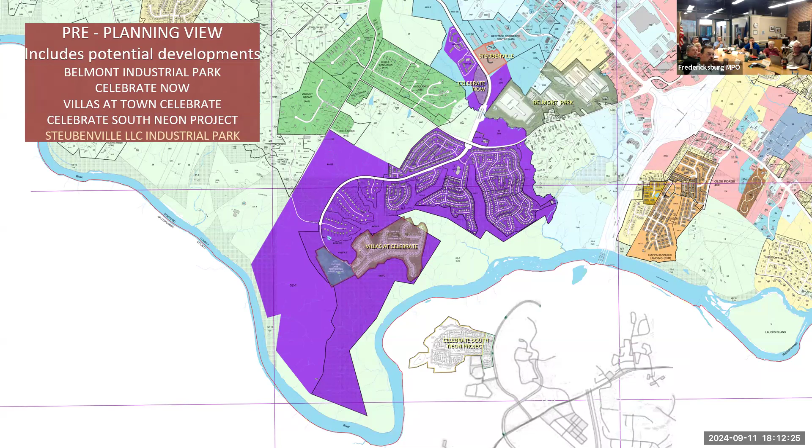But the reason that this is pretty important is, and we'll get into this in some of the other slides further on, when we start to add the roadway pathways that have been presented so far, you'll see what the problem winds up being. Okay, we'll go on to the next.

All right, these were the original plans that FAMPO had created before the consultant was involved. So we had option A over there in the red, which obviously would be impactful on Belmont Park, should that happen. Goes down south, crosses the bridge, crosses the river, pretty close to where I-95 is, and of course where the Quarry Lake is, and where the England Run stream is, right there.

Either going down Celebrate Virginia or actually going down Greenbank Road, you would then be able to do option B, which is this kind of yellowish color, which of course you can see conflicts with potential approved property for the Villas at Celebrate, and then crosses the river and connects to Gordon Shelton Boulevard. C is the blue one, which again could be arrived at by various different ways. And it's basically the most direct route, crosses over, but of course, the Silver Companies Celebrate South Neon project wound up being directly in that path. So that had to be modified.

And of course, in green, with the Greenbank Road, it was going to be an extension at the very top where the Commerce Parkway was going to be extended. It was going to cross over, pass through an existing apartment complex that's owned by Celebrate Virginia. Then ultimately connect to Greenbank Road, go down all the way, and then, of course, you'd be able to use any of these different options. Option D being the furthest down into your Cannon Ridge and then across. Now, this winds up not connecting to Gordon Shelton Boulevard, but it was going to connect actually to the Carl D. Silver Parkway right at that point. So those were the original ones.

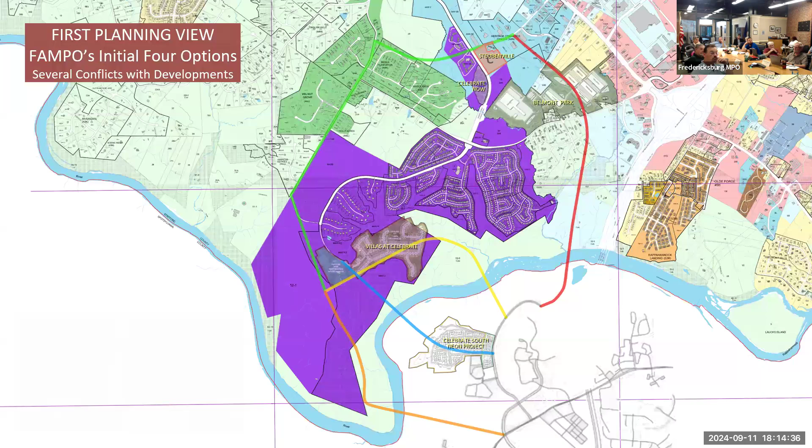Then, of course, the consultant has been making some modifications. And if we can go to the next slide, we'll see those. Okay. The method of getting to purple, option A, still uses Commerce Parkway, but it doesn't access it in the way it did before. Still goes through Belmont Park, goes a little bit further east. It is very close right here to a stream, which is called the Laurel Branch. It goes up there, and there's an RPA in that position, so it's close to that. It crosses within 100 feet of a home on Sanford Drive, and then was going to cross over another home off of a side street from England Run Lane. And then come pretty close, a little bit further away than the original FAMPO model, but still cross and connect to Gordon Shelton Boulevard.

B and C make use of Celebrate Virginia Parkway. B would still kind of interfere with the Villas at Celebrate if that was to happen. And then C would go down further into Cannon Ridge, and so forth. The difficulty with this particular C is the elevations are very varied here because there's several different streams that come in there. So this would involve a lot of changes to the topography to accommodate that. And there also are bluffs here on the eastern side of the river that would be definitely difficult to modify too. The other thing with C is where it connects to Gordon Shelton Boulevard, it actually passes through two housing developments. There's an access road to get to the different housing developments, but it was going to pass right through there.

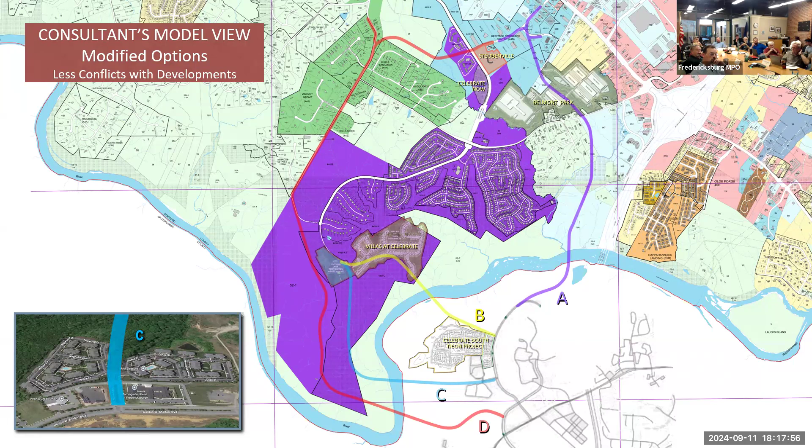Go on to the next one.

Okay. B2 is a new option that they have recently added. The reason that B2 was added is because you can see that B1 originally was potentially going to go through this particular Villas at Celebrate project, but now, of course, at the very end of the extended Celebrate Virginia Parkway, that winds up avoiding it. You can see both B1 and B2 do not interfere with the Neon project anymore, that it goes north of that before it connects to the Gordon Shelton Boulevard.

Okay, all right. Can I add something? Absolutely. Okay, I just want to point out that there's supposed to be over 40,000 trips a day by 2050. And if you have a segment that's shorter like this versus B1, let's say B1 is a quarter mile longer. So if you have 40,000 trips a day that have to drive a quarter mile longer, multiply 40,000 times a quarter mile, and you come up with 10,000 more miles per day of driving. So that's 10,000 more miles of air pollution and fuel usage.

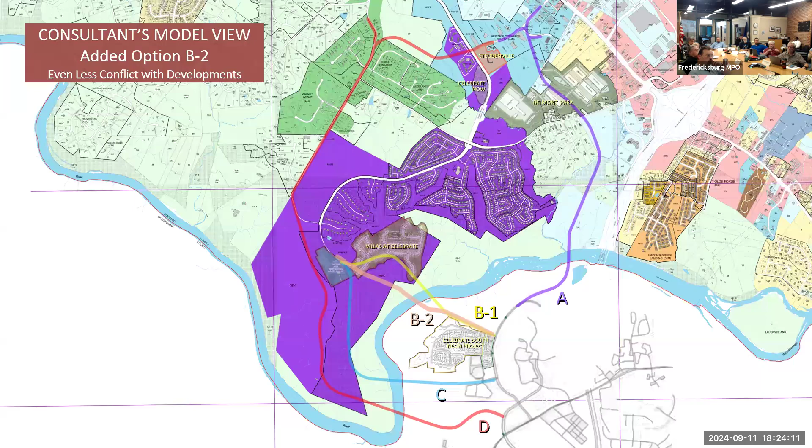I can talk about the Celebrate Virginia Parkway a little bit later on, but there's some information I want to discuss about that. Okay, next slide, please. Okay, now some citizen modeled a different view, and of course that was me. So these are just observations from analysis that I made, and I decided that we might use a few other things.

The original consultant's view for option A there, I moved where it winds up connecting to Commerce Parkway from where they had it before, where their paths were. And again, keep in mind, any lines that are drawn are simply lines on a map that will ultimately be modified one way or the other. That's obviously happened many times already. But the lines that the consultant had created, which was on the purple map in the previous slide, actually had paths that were going over existing buildings on Commerce Parkway and so forth.

The other thing that I wound up doing, as you can see, now it avoids any of those existing buildings, so it's not interfering with them. At Commerce Parkway, the path came through here before, and if you recall, I said it was about 100 feet away from a home. And it was very close to the RPA, that's for the stream that goes through there. Well, I've moved it further east away from that so that it was not going to be interfering with the home, and it wasn't going to interfere with the RPA nearly as much.

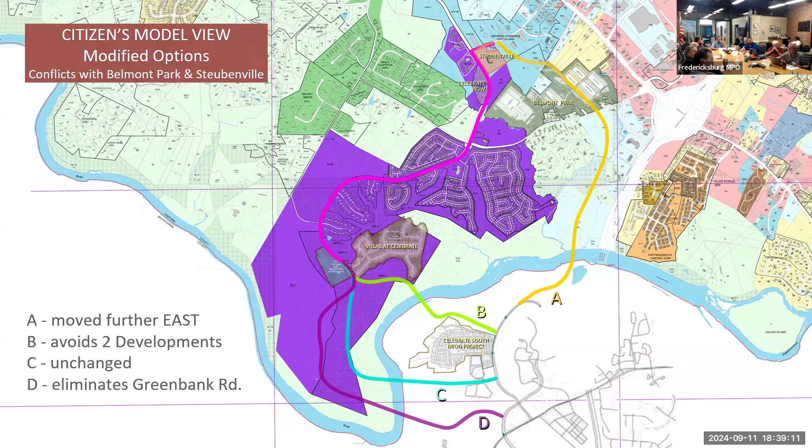Yeah. Okay. If I were this Commonwealth Transportation Board guy, I'd say D is your option. Let's roll with it. I'll give you the money for the bridge and the developer can build a road to it. Right? Yep. Joe, is that still in the SSD, the Special Service District? Wasn't Celebrate in a Special Service District before? Yeah, they're in a CDA, Community Development. But that area also has an agreement with the Department of Historic Resources that needs to be renewed.

But what I wanted to say is, if we really want to maximize the use of existing infrastructure, Celebrate Virginia Parkway is it. The other map showed it better, but if you look at the aerial view, it's 6 lanes on half of it. And the intersection splits up at Banks Ford, so that diffuses the traffic in different directions to make traffic flow better. Then you also have the underpass on Route 17, so you don't have to make a left turn, just take the loop. That's right.

And so that infrastructure also has a sidewalk that goes under 17. So if you combine the trail system with that sidewalk, you can cross Route 17 without pedestrians and traffic touching. So there's so many different benefits to it.

And I presented these benefits in a presentation to this committee about 2 years ago. So what I'd like to do at the next meeting is have a presentation, and I'll revise it some, put it back, kind of like Alan's presentation here. All right.

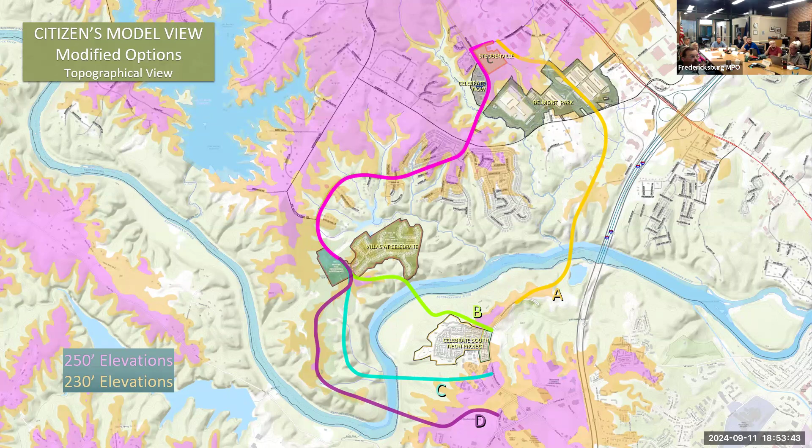So again, this is in the slideshow that's presented for you. You can look at it in much greater detail if you zoom in really closely. And like Mr. Hollis said as well, regarding where A connects into Commerce, we can look at that in the next slideshow really quickly, and I'll try to breeze right through that as much as possible.

Okay. So, I wanted to show you the side-by-side comparison of the two, so you can see the consultant's option versus the citizens' options. And this is south of the river and so forth. So, again, you can look at them and see what the difference is. D is essentially the same. C is too, other than the fact that it connects to Celebrate Virginia Parkway in the citizens one.

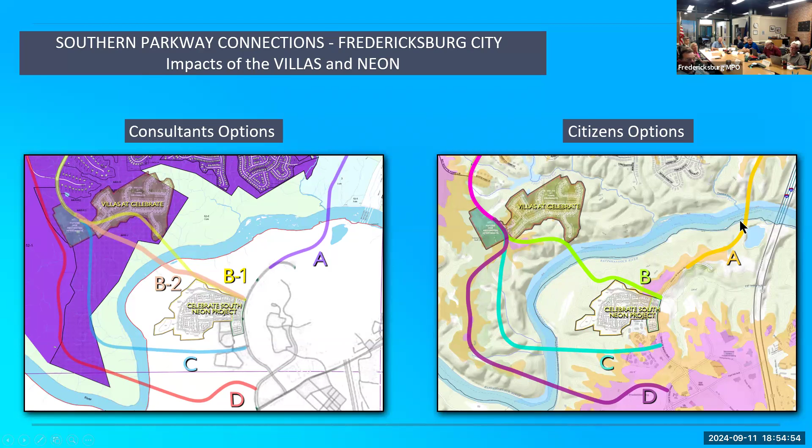B1 and B2 are slightly different, but also avoiding the neon project and avoiding these particular potential developments, as opposed to B1 possibly interfering and B2 doing a pretty good job at avoiding it. And again, a little bit further away from where the stream empties into the Rappahannock. Okay, so that's that. We can move on.

All right, now north of the river. What Mr. Hollis was talking about is these curves that we have here, if you were going to use option A. And again, that could be done, but I suppose if you really wanted to, where this citizens option connects to Commerce, that could be modified obviously up there too. But as it is right now, there are businesses there that are impacted somewhat.

This homeowner that I talked about, that's right there, that's 100 feet away from their home. This one is actually going over this home here, once we get to the point that I was looking at moving it further away so it doesn't interfere with where the homes are and so forth. Okay.

I'm sorry, go back one more. I just wanted to. Yeah. Yep, that's the one. Okay.

All right, I wanted you to know that this A and this A are in exactly the same positions on the map. So this is one way to tell that it's further east. Okay, that's all.

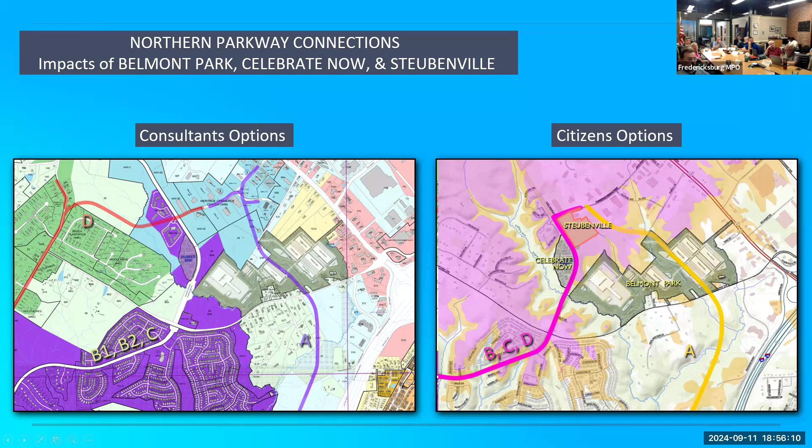Okay. Commerce Parkway is like the key for almost everything because of the fact that all the different options wind up connecting some way. All right. Here's where it ends right now.

This is a wrestling center right now. There's the Steubenville LLC property that you can see right there. So right now it's in that position, and Belmont Park is outlined by the red over there. So Steubenville again has begun to be cleared, and access at the end of Commerce Parkway through this, you kind of can't really see it on here.

This isn't 4K, is it? But the construction is going on, and this from Celebrate Virginia Parkway, you can kind of see how the clearings are going on. I inquired why there were no permits that were displayed anywhere, and a week later they were there.

So like I said, it was at a policy committee actually that some of the residents of the Del Webb community asked the policy committee, what's going on south of where the FBI building is. And the FBI building is right there. So that's essentially what prompted me to investigate a little bit more.

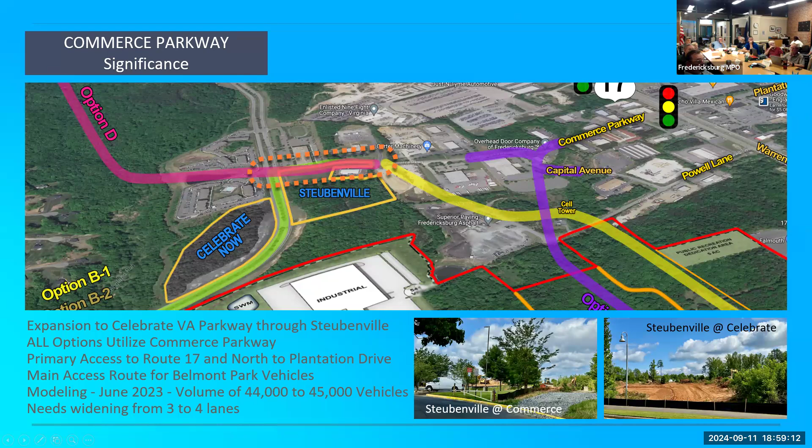So the question is, if you're going to try to get bicyclists and joggers and walkers to use that, I can imagine that if I was north of the river, in order to get down to Celebrate Virginia South and Central Park, et cetera, I have a definitive goal, a reason for going south along the bridge to get to those spots, even if I'm just jogging.

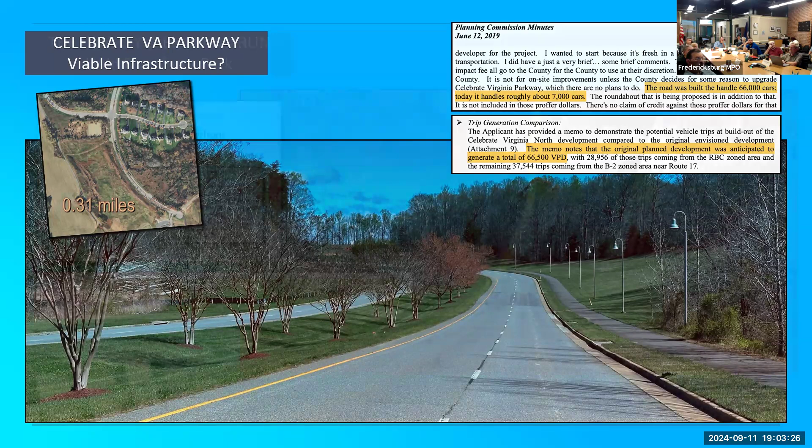There is the Wild Riverfront Park development, which essentially takes the quarry and provides access along the quarry. So if there was going to be a roadway right in that particular area, I think that would probably interfere with that whole concept. So I just wanted to point that out as well. And there's the written description of Wild Riverfront Park. I think it's on page 19 in the comprehensive plan for the city of Fredericksburg.

All four options will go through the Wild Riverfront Park. Excuse me? All four options, or 5 options, will all go through that Riverfront Park. Well, that's supposedly where they have it located in this area. John will show you a map of the whole environmental plan for that whole riverbank and all four of them. Well, I'm not saying that it wouldn't interfere with any of the other plans. I'm just saying that what they intend to do here, as far as the activities, really wouldn't be viable if the roadway was there.

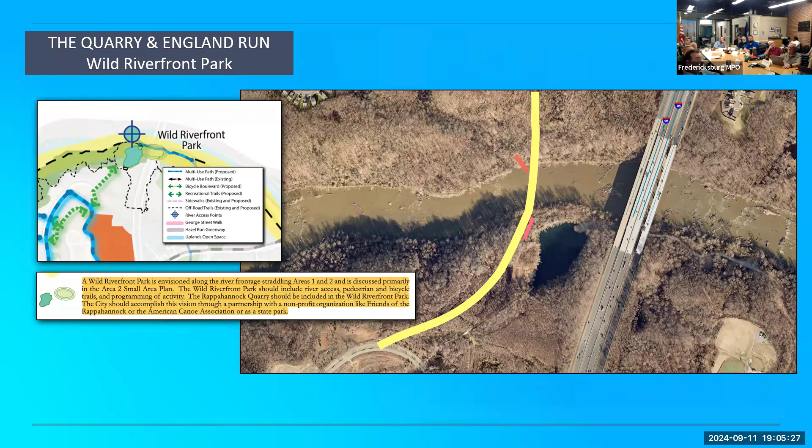Okay. You're gonna be talking about all this. I got the updated one, yep. Because one of the most important things that we haven't even discussed yet are the easements. And the easements basically push everything towards using natural land.

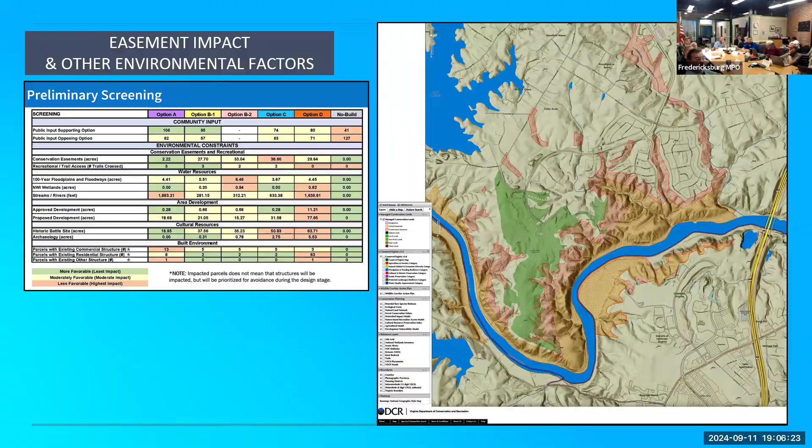I don't know what the priority is or how easements could potentially be involved or how to get around them. But you can see in the map that there are no easements, whether they're co-held or whatever, east of the England Run stream and right up to the quarry too. But once you get into any of the other areas, there are easements in place. And we know that Friends of the Rappahannock, et cetera, are very concerned about losing the easements that they currently have. Okay, thanks.

One more quick. Belmont Park winds up being involved with all this because of its location, the fact that option A goes through. All right, Google 3D map. Basically, we have Celebrate Virginia Parkway right here. You can go to the next slide, actually. All the different traffic lights along Route 17. Commerce Parkway right here, Powell Lane right here, and Plantation Drive right there. There are a lot of traffic lights along there.

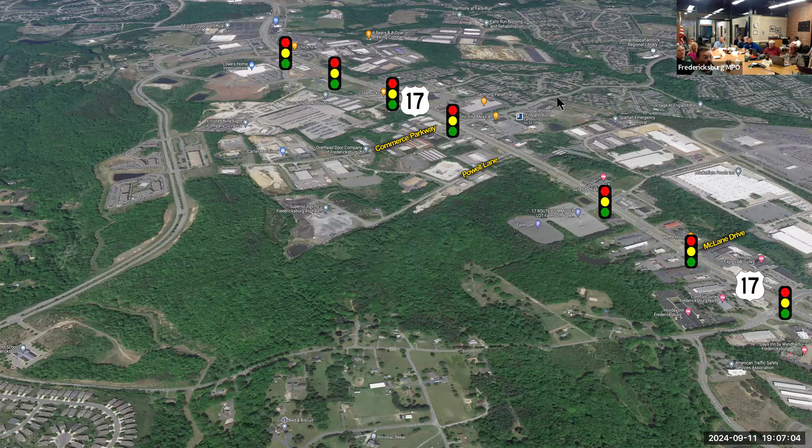Where Belmont Park is, and we can go to the next slide. Belmont Park, the way it was drawn up and recommended to the Planning Commission and to the Board of Supervisors, is that the main egress to Belmont Park is along Powell Lane.

We're talking about 450 tractor trailers a day anticipated and stuff like that. They will only have right out or right in, which means that none of the vehicles that would be traveling along Route 17 in a northwesterly direction would be able to use Powell Lane whatsoever.

So that is why there's a proffer that Belmont Park offered for retiming and redevelopment of the Commerce Parkway intersection. Because so many of the vehicles are going to have to ultimately get to Belmont Park by using Commerce Parkway and the traffic intersection that it has, and then go down what is known as Capital Avenue to get to Powell Lane to ultimately get into Belmont Park. So I just wanted to point all that out.

Right in, right out, Powell Lane, left in, left out, Commerce Parkway. But because it has the traffic light, you're gonna be able to go in and out using that intersection. But again, Commerce Parkway right now is just, it's not even 4 lanes here. And of course, this is the extension that we were hoping for. Okay, next.

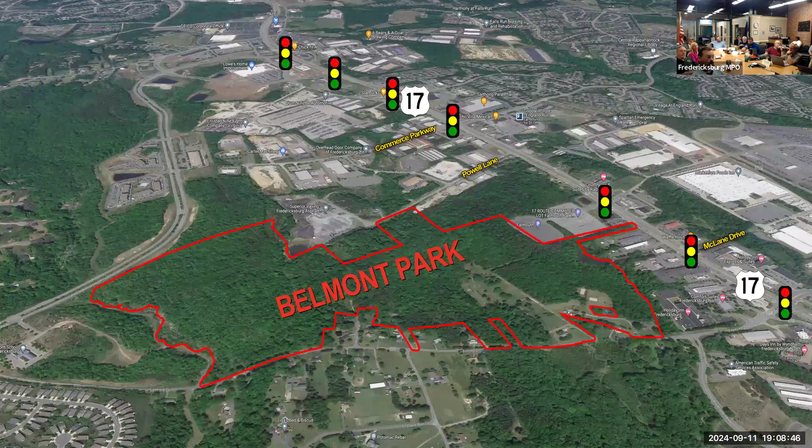Okay, the way it was developed. Heavy industrial for M2, M1 over here in this area. Okay, this is Sanford Drive, by the way. Riverside Parkway down here. Okay. And next. Okay, the original concept plan.

This building is the only building that they have a user to occupy. None of the other spaces have potential users. The A. Duie Pyle trucking firm wants to use this particular part of the property. All right, they have nothing else for the other areas.

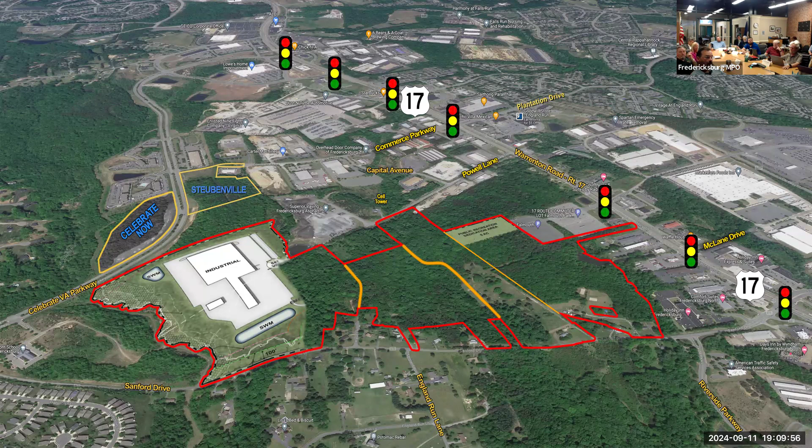Okay. The proffer of 5 acres to be used for recreational purposes was proffered by Belmont Park to the county. So there's 5 acres that are in that particular area. But again, this is the only area that's currently intended to be used. We see the Steubenville property, we see Celebrate now, so you can kind of see what was all going on there. Okay, next slide.

Okay, the consultant's options. Again, going over some of the buildings, that's why it's circled right there. My question here is, as it was going to cross over Powell Lane, what kind of intersection would that be if there are tractor trailers that are potentially crossing here? Because if there are 44,000 vehicles potentially using this a day, that is going to be a point of contention where you would have vehicles trying to leave the area here or the other developments that happen here, as opposed to, are we going to need another overpass there besides the overpass that would be necessary over Sanford Drive as well? I don't know.

Consultant again, right here, they're right in the stream RPA area. So that was that. And they also actually were going over the top of a home that was in that area. Okay, no problem. Can I add one thing? Sure. The Belmont Park proffer a connection road between the east side and the west side going across option 1, so there'll be another intersection there too. Proffers are county law, so.

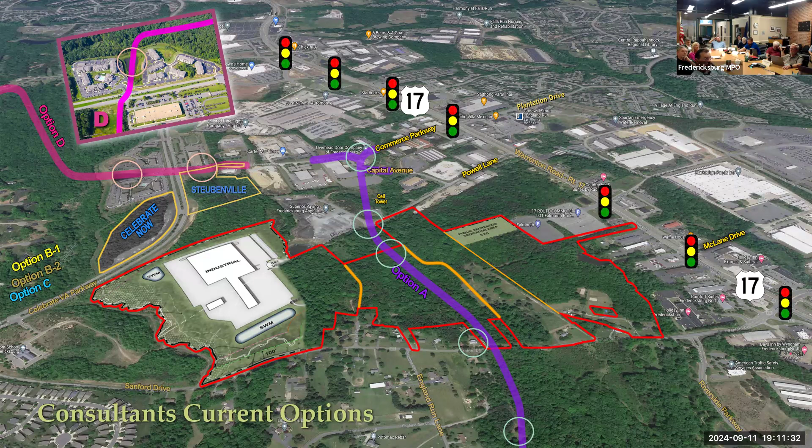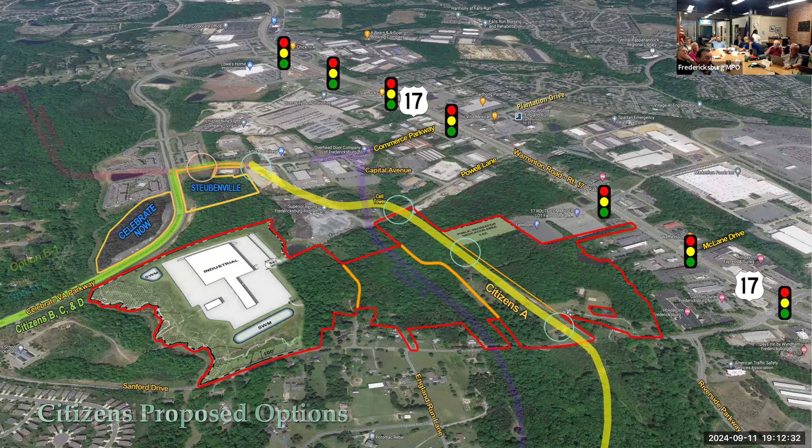And again, going further away from where the homeowner is tucked away in that area right there. Okay, and B, C, and D in the citizens plan will make use of Celebrate Virginia Parkway. Okay. And then if you were to compare the option locations, you can see consultants options, the citizens options. Option D in the consultants, B1, B2, and C along Celebrate. And if you were using the citizens, it would be B, C, and D using Celebrate Virginia Parkway.

Now, remember I said as far as the bikes and pedestrians, there is effort still to try to develop this land similar to how the consultant originally wanted to do it back in 2021. This entire 132 acres was supposed to be for sports tourism. There were gonna be baseball fields, little league fields, soccer fields, 2 indoor athletic facilities.

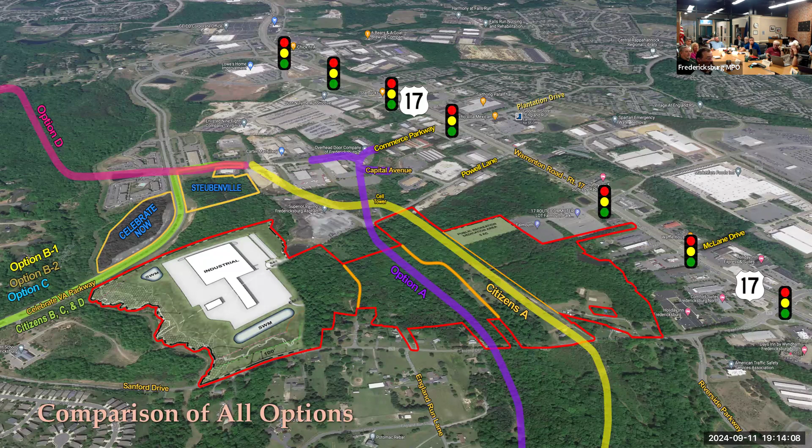If you were a bicyclist and pedestrian walking or jogging, and you were going along there, would that be a better reason for using it, that kind of recreational use, as opposed to all the other options that currently exist for the industrial uses? So Mr. Breeder and myself and several other people are continuing to push to bring recreation to Stafford County in this area because there isn't any. Okay. I don't know if that's the last slide.

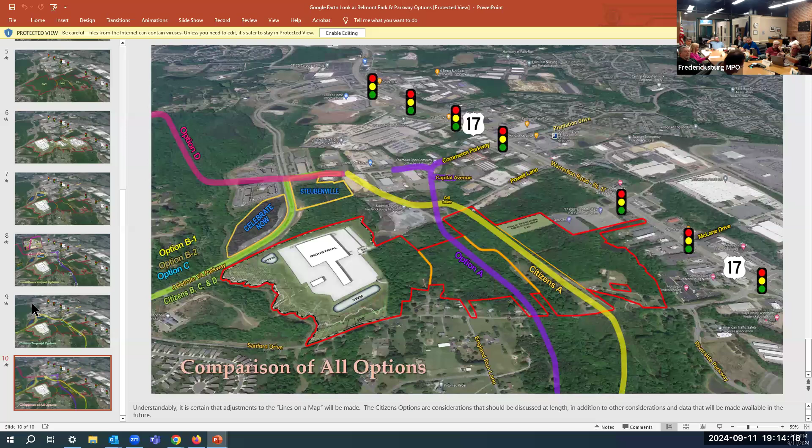All right, I'm done. Sorry. Good job. Man. Those are nice maps. I'm enthralled.

All right, thank you. Next item is another talk. Yeah, this big update. I'm actually gonna stand up. John's update on the study. All right, I will be quick, but I encourage y'all to interrupt me as much as you want.

Before I do that, I'm gonna go hit the AC button real quick. Oh, John, let me do that. One for cooler. All right.

So most of this information was from the prior stakeholder meeting in the last month. Al often attends, and this is just information that is put out and folks can observe. So I'll be touching a lot of that. Just a reminder, when we're talking about the corridors, we're actually intentionally drawing the width a lot larger to try to account for more impacts so that the actual width of the road is narrower,

and so that once you get later on, you can start bending and curving the actual footprint while still capturing how much potential impact there will be, so that you're not, say, discounting this section just because you know you can probably bend it around. Go ahead and count it. Does everybody understand that? Because all of the environmental metrics presuppose that you understand what's going on here. That 250-foot buffer is more than twice what will actually be built. It's more than twice what the right of way is. Yeah.

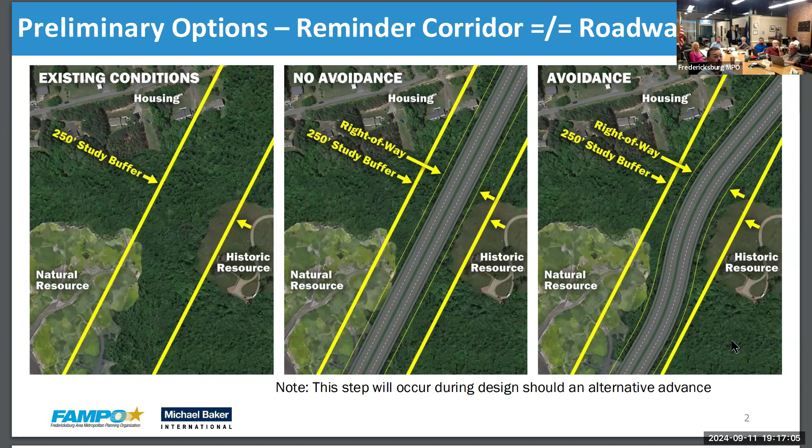So environmental screening. As we've already mentioned, here are the preliminary options. They are drawn and designed out. The consultants have been actually working and tweaking those. In the initial proposal with option A, there was never really an intent to connect with Celebrate Virginia here. However, at some stage, for whatever reason, that actually worked its way into the discussions, and we're just making it clear that for option A, there is no connection with Celebrate Virginia.

There were concerns that all of a sudden Celebrate Virginia would use this as a way to access 17. But John, I think that dotted line is potentially... Can be added later, yes. It doesn't have to be bold. It's more accurate.

They've also shortened how the connections happen for B1, B2, and option C, and how it curves into Celebrate Virginia. They're also proposing, as folks said, what about Powell Lane, Capital Avenue? They're actually looking at cul-de-sacing those. They'll nip off some of those entrances to prioritize flow through from Commerce Parkway, rather than allowing folks to basically try to cut on Powell and Capital in that same area.

And finally, they're aware of the Steubenville thing. It's a grading site at this point in time. It's still an empty lot. So they're aware, they're watching it. As soon as there's a change on Stafford County's proposed plans, I think they're probably refreshing it at a rate just slightly behind Al. But they are aware and they're watching for anything to pop up that would impact, and that goes for all the developments in general along the corridor.

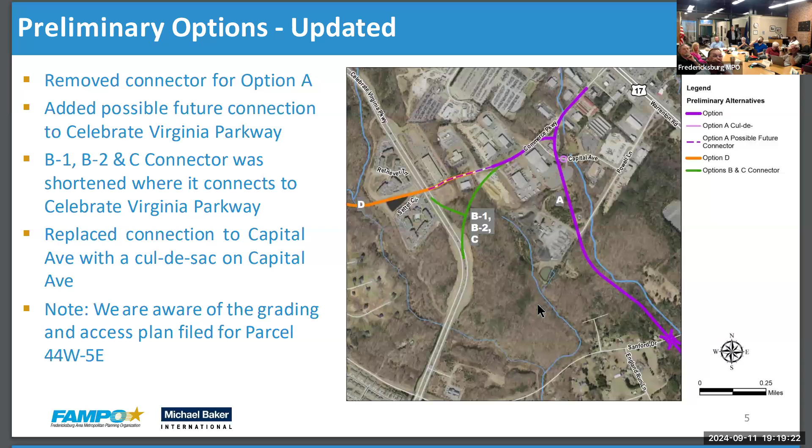So they are taking all available secondary sources. That just means they're not actually going out and doing land surveying. It's pulling from GIS tools from the county, states, and other jurisdictions. The consultants themselves separated things into high and medium impacts based on what they're comparing it to.

So the options are being compared against each other, and they're scored in green for most favorable or least impact, moderate that says there's something here that would need to be addressed, or less favorable, highest impact in red if it's not the preferred result. So in the preliminary screenings, this is the big table.

As we've noted, there's a lot of conservation easements. And you can see that option C, and to a lesser extent option B, hit those conservation easements relatively hard. Less so for option B1, a little bit less than B2, surprisingly enough. Actually, that shorter segment across has more impact on the conservation easements. Option A has the least, 1 acre.

It also counts the trails, so option B1 reaches slightly more trails than option A, or option B2 and C. Option D does not actually connect or cross any trails. No build is best, up until the traffic analysis, my guess.

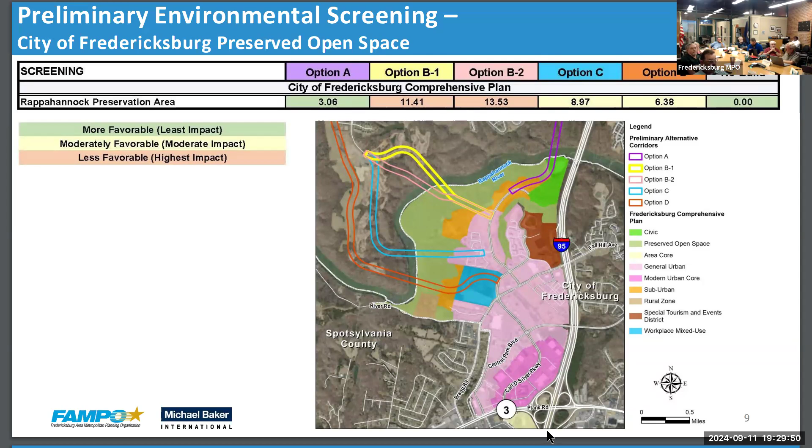And then, of course, the farmland soils. And coming back to this, they noted that because this is within FAMPO's urbanized area, the NEPA process would kind of be like, you're in the urbanized area, we don't really look at farmland soils. It's good to know. It was actually interesting to know how much of particularly this peninsula was still considered to be prime farmland, or at least options there. So we took that assessment into consideration.

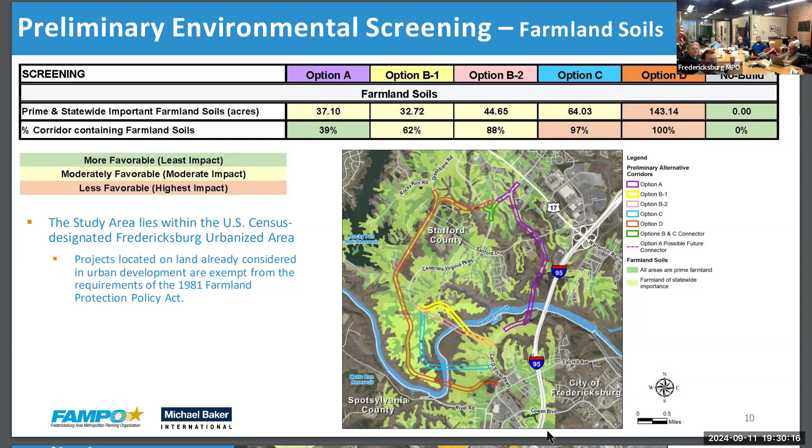And no build gets the best score again. Yeah, this is a good thing because it's the end of the first quarter. So again, here are the corridors. I put up the current parcels, particularly parcels with occupied units as well. And you can see this is the one little sliver for option A, but otherwise it's been further west than some of yours. You can see that it does have heavy impacts to Greenbank, particularly as it comes around Sanford Drive there, and how it can hook around and through basically an existing intersection that's built through kind of a housing area to the south.

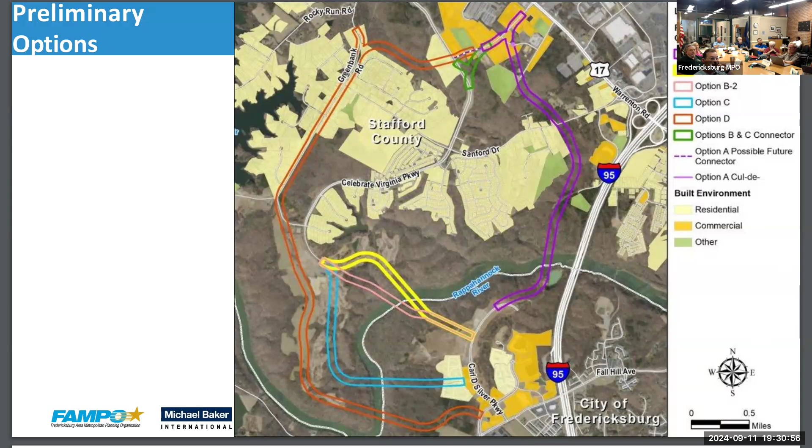So now modeling update. I said we're at the end of the first quarter. The environmental is one section. We got good news on the modeling. The raw numbers are out for the modeling, not the fancy maps that show the congestion and everything. But because the numbers are out there, we're able to feed that into the microsimulation analysis. This is what caused kind of the delay earlier this month. Basically, the model, the VISSIM model, the software that VDOT used and the consultants used, disagreed and they didn't want to talk to each other. So we had to fix that.

We've since fixed that. Actually, I can now say that VDOT has said the model looked good. They want to add the roundabout on Banks Ford and Celebrate. They're like, do it. But the consultants were like, how temporary is this treatment? We're like, go ahead, assume that that's the base year for now and 2050. So that's going to take that into consideration.

And then they're going to bring us more information about how the traffic is flowing to and from the bridge, as well as the intersections, basically in a large swath around the study area, including Route 3, Route 17, and points even on the other side of the interstate in the city of Fredericksburg. So we'll have intersection levels of service and travel times. We'll be able to say, if you need to go from point A to point B, how long is that going to take you depending on where you're moving, particularly across the river?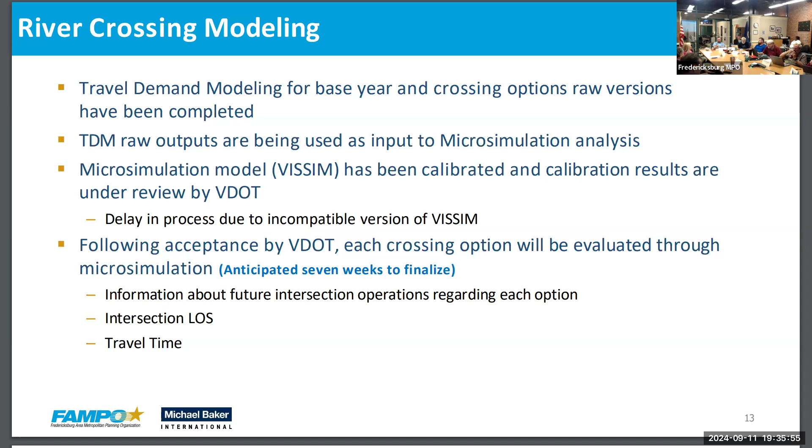I don't agree with that. Because anybody to me that's in Spotsylvania would never need to take this. They might as well get on 95. 6,000 staff members going north, the half of them that live in Spotsylvania, they're going to use this bridge. So in Spotsylvania, they won't get on I-95.

Plus, it reduces traffic between Bragg Road and Route 1 on Route 3. So that's significant when you take traffic off of the interchange on Route 3, so that has its benefits.

Great question, but I swear I'll let you go. No, you're good. Please ask questions. I'll try to talk less.

Go ahead. Regarding the 2050 model, right now all decisions that are being made are factoring that model, saying these things are going to happen, or these are things that we think are going to happen. We're in the initial planning phases right now, right? So are we saying this is going to be a thing, or are we saying this might be a thing unless someone changes their mind?

We're still definitely at it might be a thing, because we still have to acquire funding, we still have to go through the full NEPA analysis, we still have to do the handoff, we have to have the jurisdictions involved sign on and agree to it, so it's still in it might eventually be a thing.

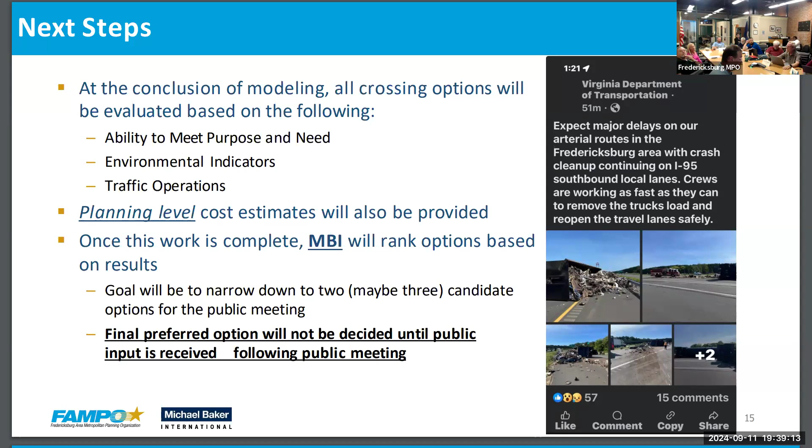But they won't be showing a preferred option until well after public input is done and it goes through the committees one more time. So they're going to do that in November. This is where the public meeting comes in. It's going to be at the FredNats ballpark. Probably do a tour of the area before or after.

I've driven all the way down the end of Gordon Shelton before and turned around and come back. It's going to be an open house. They're going to have each one of the options. They're going to have the impacts. And we're still going to be soliciting input.

So this is the, come tell us, and they're going to try to whittle it down. They're going to say, out of all these, this option is not the best. Probably they're going to look at a couple of the similar options and say, is there a weaker one of those two, and try to narrow it down for the community to say, these are kind of the ones: this one works from the traffic operations side, this one might work better for the environmental side, whatever their combinations are. And then they're going to ask, give us feedback, and we'll work to narrow it down even more.

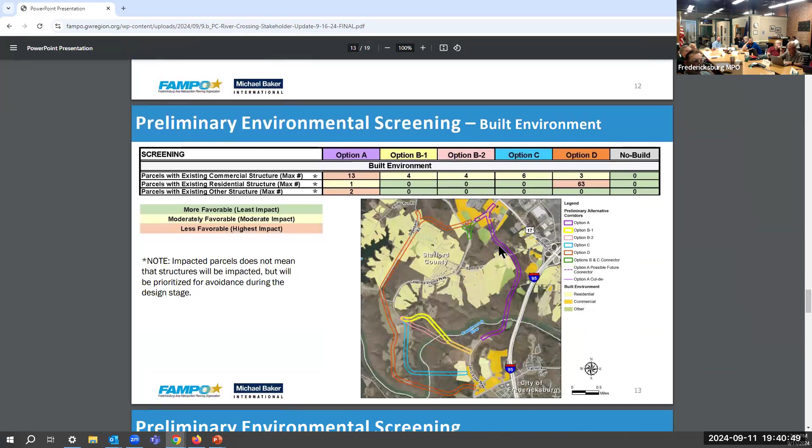Leader, can you do me a quick favor? Go to the FAMPO website, policy committee page. Sorry, Chairman, I'll just delay you one second. I just want to put this up. Do you want the September agenda? Yes, please. It's coming. Just pull it up. Click on the river crossing one. There you go. Go down to page 14. So page 14. Okay.

Do we have a time yet? A time? No, we do not yet. It's most likely going to be late afternoon, a 4 to 6 window-ish. But we haven't nailed that down because we're still working with consultants and the facility. We got the date, we have the evening, we got that settled. We'll settle the time in a little bit.

Is this the appropriate format? This is kind of what I was asking about earlier, right? When are we soliciting more comments? Al's presentation may have some actual impact for somebody to take a look at. Absolutely. So would this be the appropriate format, or do we need to push it to FAMPO and say, consider this, or maybe Al takes his show on the road to FAMPO? Both. Thanks. Anybody got any other comments for John on this subject?

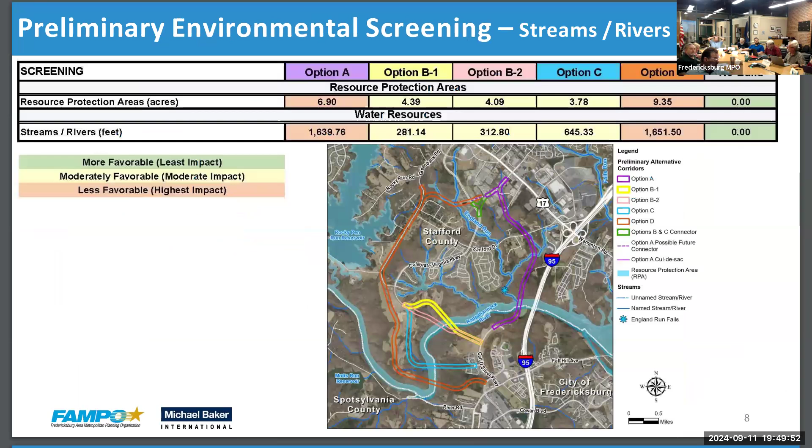It says options B1 and B2 impact the conservation easement by 27 acres and 33 acres. What I'm saying is that the conservation easement has a clause that allows a river crossing, so that conservation easement should be taken out of the total, or at least split up, saying that of the 33 acres, 17 acres of it has a clause saying that it can have a river crossing versus the rest. I don't think they should all be lumped together, because it makes it look like there's more of an impact.

So you can slide a gap, a 200 and some foot gap, on the north side. You don't have that on the south side, and the bulk of the conservation easement is south. So they are kind of factoring some of that. But the easement language says that easement can be moved also. On the north side, yeah, that can slide. On the south side, it can't.

Does this study anything on Route 3? Yes, that's in the traffic model. Absolutely. Because as a Spotsylvania guy talking about this project, I feel like my hands are tied by my board, where they took us out of the study, so therefore we really ain't got nothing to talk about. Spotsylvania is still a stakeholder in all of these meetings, so they are at the table. I understand. Yeah, including the environmental stuff too, even though it's outside.

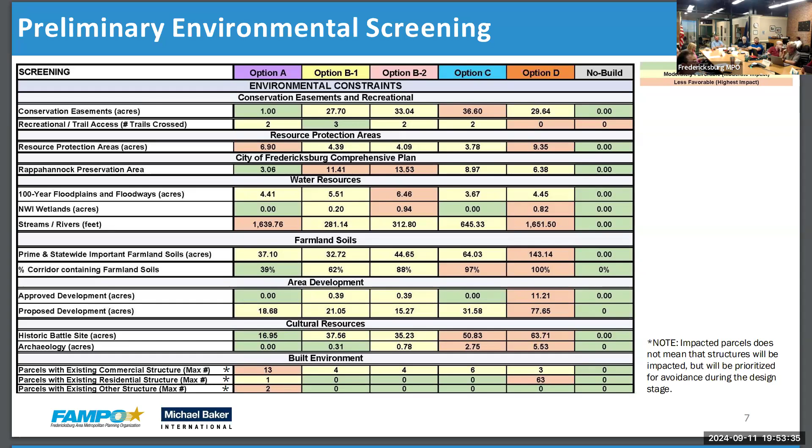We built Spotsylvania Parkway from the subdivision I live in, and the one across the street was done with proffers. And if we hadn't built it, Spotsylvania would be in trouble right now, I can tell you that. And the county should have continued it on, right on around, all the way to Route 3, but didn't. We have to deal with circumstances we have now. Any other comments or questions for this subject?

Alan? Regarding the easements, I just wanted to know how obstructive is it? For example, on the south part of the river, the ones that are there, whether they're co-held or not. For any of the options, does that become such a strong priority point that it eliminates those choices? So at least speaking with the Virginia Outdoors Foundation, they told us that if VDOT has the option to go through them or go around, they go around.

That could be a major hindrance for any projects because normally it ties it up legally for a while. It can be. It's not just buying out that land, it has to be land in trade, and they're going to look to have multiples of what you're taking. So if we're talking about, say, 20 acres, they're probably going to come back and say, where's 100 acres of just as sensitive an area, since they have to go out of the park.